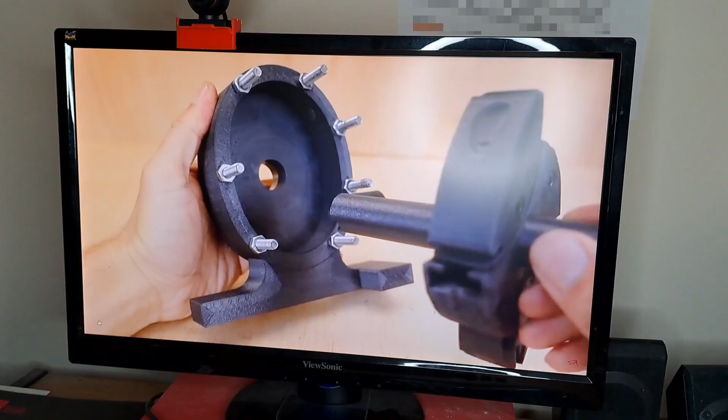Okay, so this is the thing. You can see a combustion chamber and a rotary assembly that has some moving, traveling pistons. D4A calls them traveling combustion chambers, but I'm going to call them traveling pistons because in my book that's what they are. And I just want you to see this going together so you can picture in your head

what the thing looks like, because I'm going to draw some pictures and comment on some things, and you need to know what I'm talking about, otherwise it just won't make any sense and be boring and you'll go and watch another video. There's a lot going for this engine in terms of it actually working one day, I reckon.

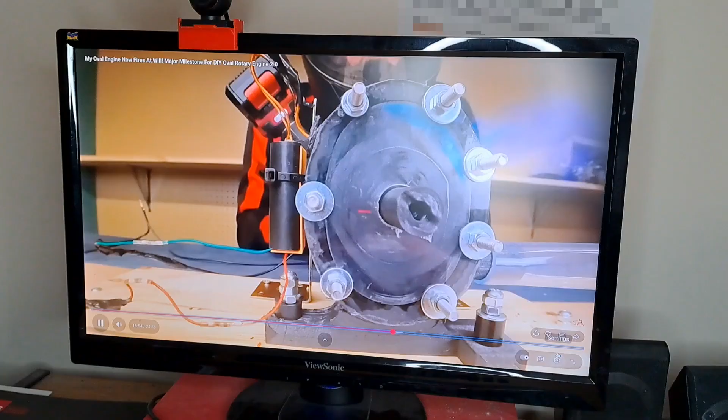And just watch this. This is 3D printed, but it's managing to generate a flame in the combustion chamber, contain it in the combustion chamber with 3D printed TPU seals. And so we can see it's got successful high pressure air because it's glowing. That means it's hot. That means it's high pressure and it's pushing on the piston assembly.

But it's not achieving self-sustaining rotation. D4A has some suggestions as to why. So these are all really about whether there's enough pressure at the right time in the combustion chamber, and I reckon these all do need looking at, and I'd add mixture. I think you may well have the potential for more power by adjusting the mixture.

None of these is hitting, and none of the comments hits what I think is probably the fundamental thing, which is friction, and that's what this video is about.

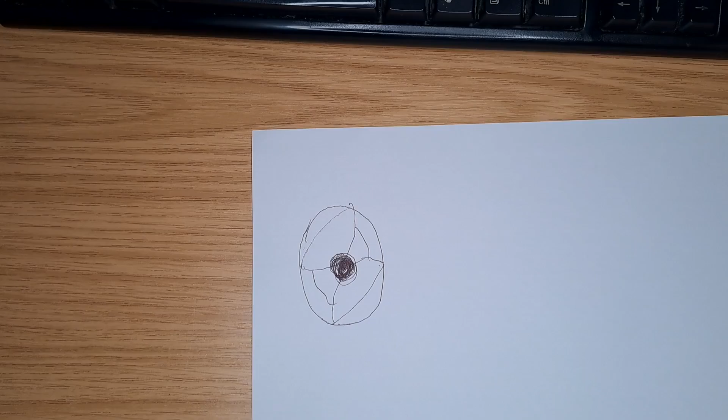If I'm right, that's the fundamental problem that needs to be overcome with this engine. So let me explain why I think this may be the case. The gas in here, just to think about how it works to start, is exerting a pressure on this piston. I'm drawing lots of little arrows normal to the surface, so they're not quite parallel to each other because the surface is curved. Right, so all along there it's exerting a pressure.

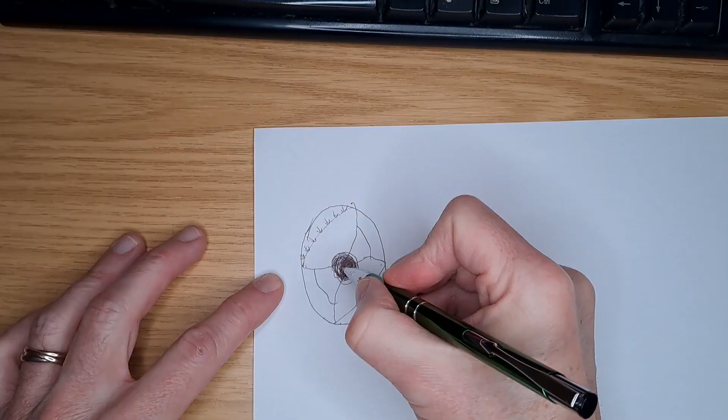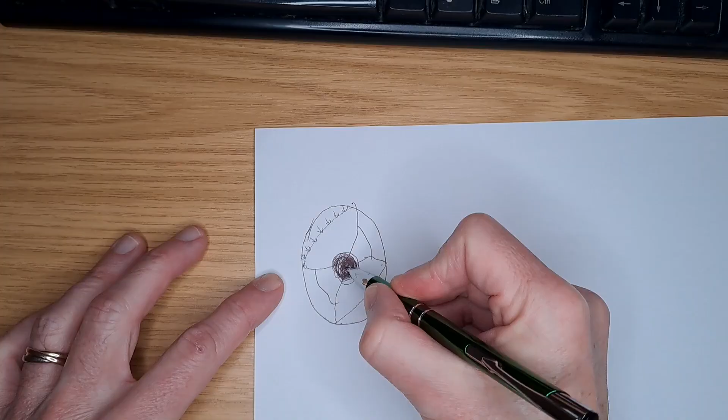This is the hub over here, and so it's rotating around this point here, and because of this traveling piston, the total net force is not centralized on the hub. The total net force is going to be something like a force from this point in that direction.

Okay, so all of the components of this one is a force that's in that direction plus a little bit in that direction. This one over here is in that direction plus a little bit in that direction. It cancels the sideways. The ones in towards the middle cancel out. So the net force is basically from the center of this curved line, a little bit in, because it'll be somewhere between, if I draw a line across there, somewhere between there and there, on the center here. There you go. And that's your force.

This is creating a torque. If you consider this lever arm from the center of the spindle, that is not directly towards the center of the spindle, and so it's creating a torque. It's a relatively small torque if you consider that the components of this force resolve into a small force in that direction and a large force in that direction.

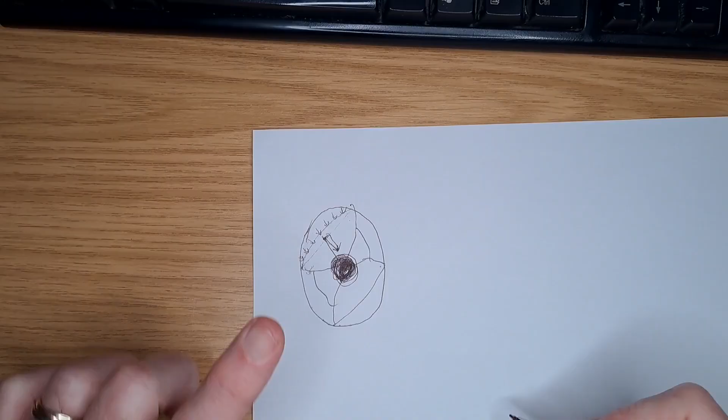This, I think, is partly where the problem's coming from, because this large force is going to be a force that drives friction, and this small force is a force that drives rotation. And it doesn't matter how high the pressure is, the ratio between these forces is the same. This one's always going to be a lot larger than this one.

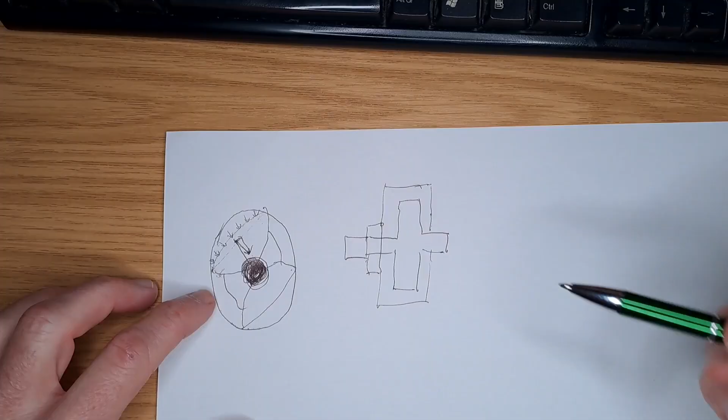Right, now I've turned it on its side, so we're looking, this is the rotor, this is the spindle, and I'll just hatch in. So that's the housing.

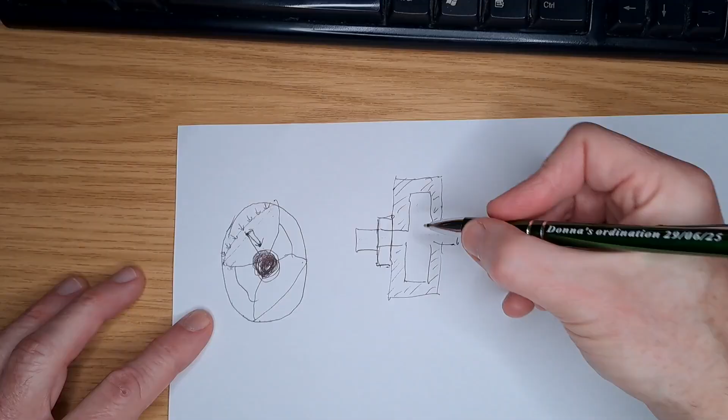Okay, so here's the spindle, and that's the rotor, and this over here is a bearing. So that frictional force, translating it from this image to this image, becomes a force that is in that direction. What does that do? That creates a torque. Given that the spindle is held firmly by the bearing over here, that creates a rotational torque this way.

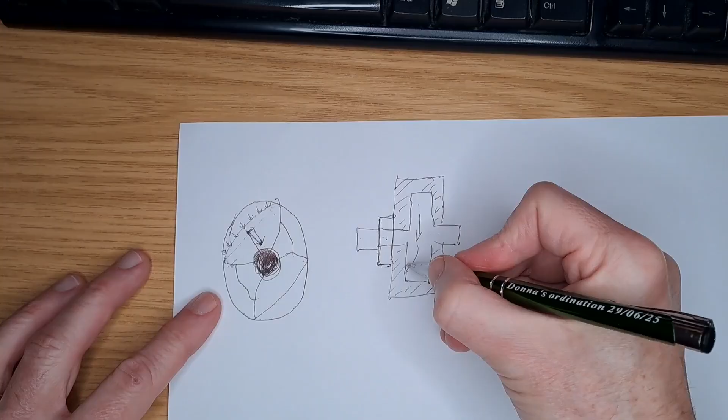And what does that do? That causes a frictional force that way and that way. The rotor pressing against the top of the housing, the face of the housing up here, and the back of the housing down here. So that frictional force is, if we come back to this image here, somewhere around here, and somewhere around here is the center of that frictional force. And if you have a look at the lever arm that's generating the torque, it's a similar length.

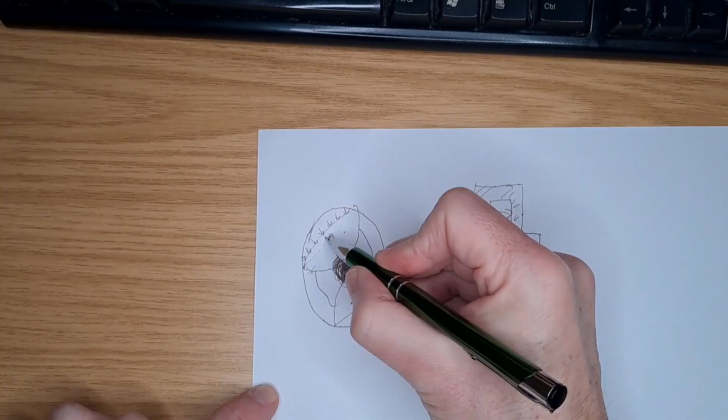So if the frictional force is greater than the rotational force, it doesn't matter how much pressure you have, this is never going to turn, because the more pressure, the more friction, and you'll never overcome the frictional force. How do we know whether or not it's higher? Well, it's going to depend on the normal force exerted over here between the rotor and the housing and the coefficient of friction.

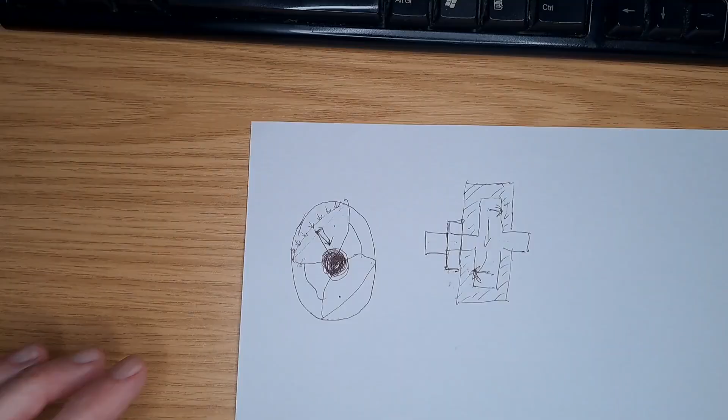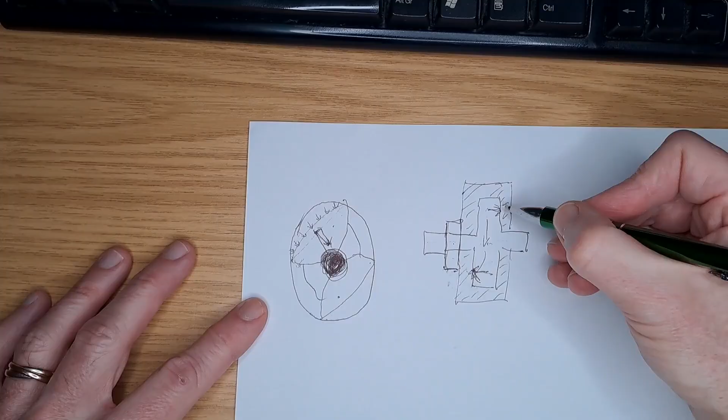I note that this arm from the bearing to the center of the rotor here is not dissimilar in length to the length of this arm, and that suggests to me that the normal force exerted here and here is quite likely to be pretty similar to the size of that force over there. So, and we know the ratio of that force to that force is quite large. You'd have to have a very small coefficient of friction along that wall and that wall for the frictional force not to prevent rotation from happening.

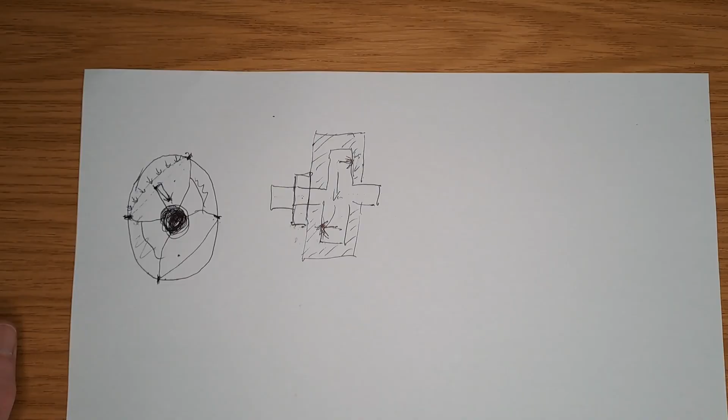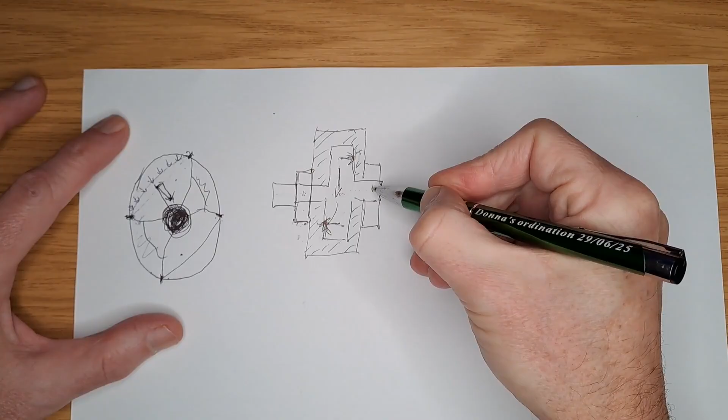I reckon that might do it, but there's more you can do with lubrication, and I think that's worth thinking about as well. If you just place a bunch of oil in these cavities over here, as this thing rotates, it's just going to keep sloshing that oil around all over the place. But that oil's going to be sealed in by your seals that you've placed here, here, here, and here. And now I think TPU is rubbery, and it is quite sticky. So I think these TPU seals are also creating a real drag, probably, against the side of the housing.

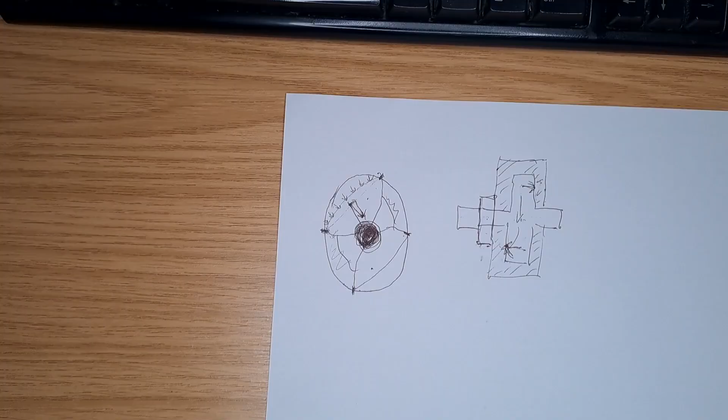If you have a layer of oil sloshing around in here, it's going to lubricate those TPU seals, and I think that will reduce another source of friction. That particular source of friction is constant regardless of how much pressure there is. Well, I suppose it'll be affected a bit by pressure because the pressure will be forcing it from the side, but I suspect with enough pressure you could overcome the friction from the TPU seals.

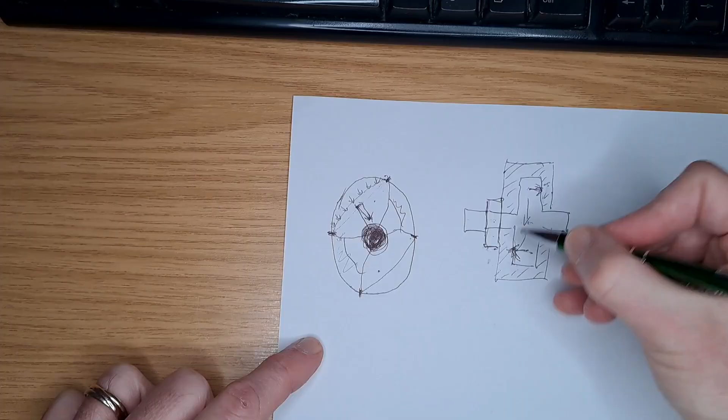But this other friction against the sides here, it doesn't matter how much pressure you have. But put some oil in here, you can reduce the friction there and there, and you can also reduce the friction on the TPU seals. Final comment on friction is just about the filament. The carbon fiber in the filament tends to result in it having quite a rough finish. There are videos on YouTube where people have looked at how to smooth the surface of their 3D prints. Might be worth looking into those.

There's not a lot of moving parts, but there are some moving parts, and the traveling pistons particularly pressing against the front and back of the housing, or moving within the center part of the rotor. I can see there's potential for frictional issues there. Oil will help a lot. Smoothing the surfaces, if you can, will also help.